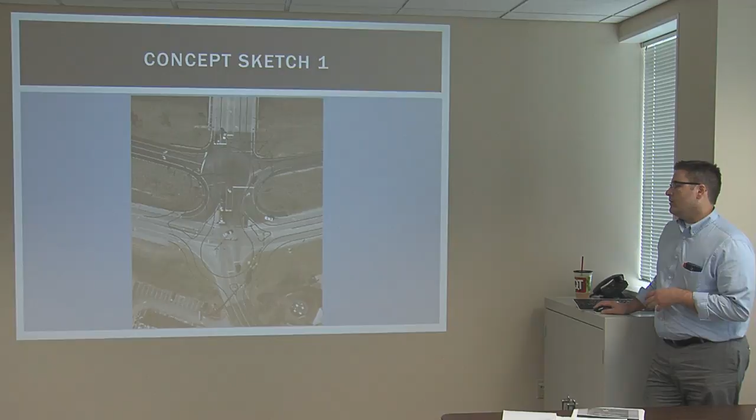We've got our project scope defined. We're going to look at several different options. We've come up with two different roundabout configurations that are a little bit novel. While they're unique, and you haven't really seen much that looks like this around St. Louis, they're not completely foreign. We didn't dream them up completely.

So we want to sit down with the consultant and with MoDOT, look at the options we've come up with, see if somebody with more experience at roundabout design than we have has a better idea, select one option to move forward with, and then take a step-by-step approach, just analyzing that the next step makes sense, and moving forward, eventually getting to the point where we have a concept plan and budget that we can do a grant application on.

Any questions on that?

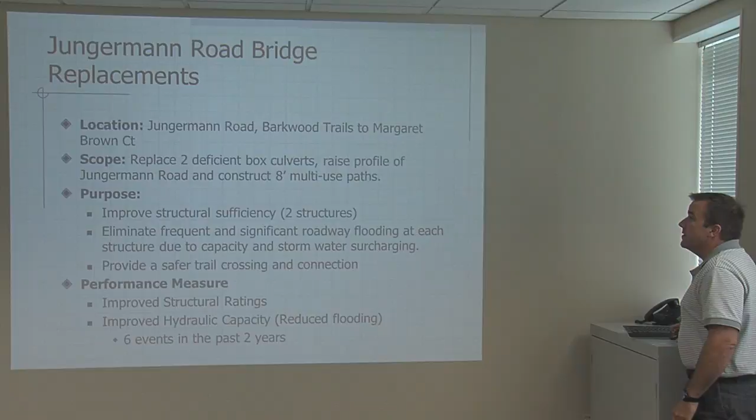St. Peters has 3 projects that we will be presenting this afternoon. The first is the Jungermann Road Bridge Replacements Project. Jungermann Road between Barkwood Trails Drive and Margaret Brown Court has 2 box culvert structures in that segment. One is a 4-barrel box culvert, the other is a single-barrel box culvert. Both of those culverts qualify for MoDOT's annual or biannual inspection program, and both were found to be structurally deficient.

East-West Gateway, at the beginning of this year, sent out a solicitation for supplemental bridge replacement funds. We submitted for that project and received FY16 construction, or FY15 design and FY16 construction funds, to replace those culverts.

One of the things that pointed us in that direction, other than the insufficiency of those 2 box culvert structures, is this area experiences periodic flooding, flash flooding. This year has been especially troublesome, with the road closed as many as 5 times in the last 6 weeks due to various flash floodings. But on average, about once a year we have to close the road due to some type of flash flooding, and that's due to 2 things.

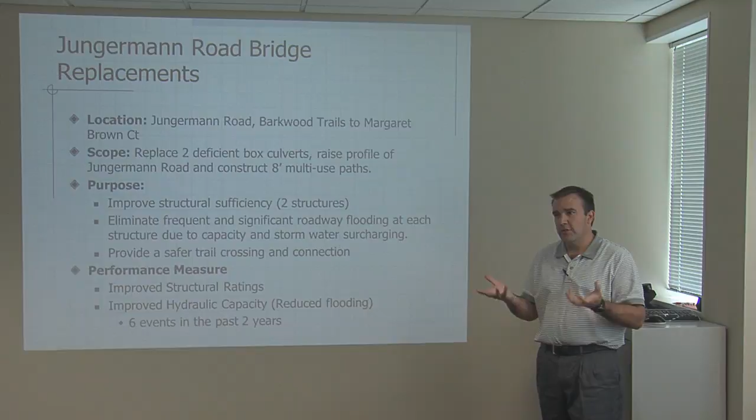These are findings from a stormwater master plan study performed citywide by Black and Veatch. One is that both structures are not hydraulically sufficient for the amount of flow going to them - they need to be larger, with higher hydraulic capacity. The second piece is that the road profile itself, as the creek rises, the storm sewers that connect to these culverts surcharge, which also contributes to road flooding. The stormwater literally comes out of the structures and into the roadway.

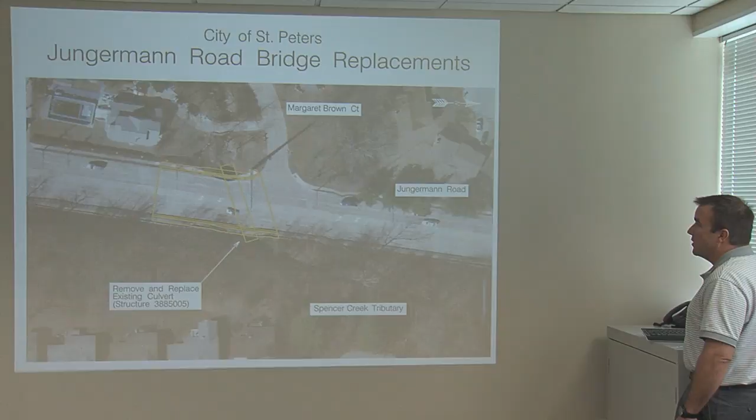So this is the project location. Just for reference, north is this way, south is that way.

Willott Road is maybe about a half-mile north here. This is Barkwood Trails, and this is a trail crossing. So this is the 4-barrel culvert. That picture I showed you where the road was kind of rolling, this is where that culvert is located.

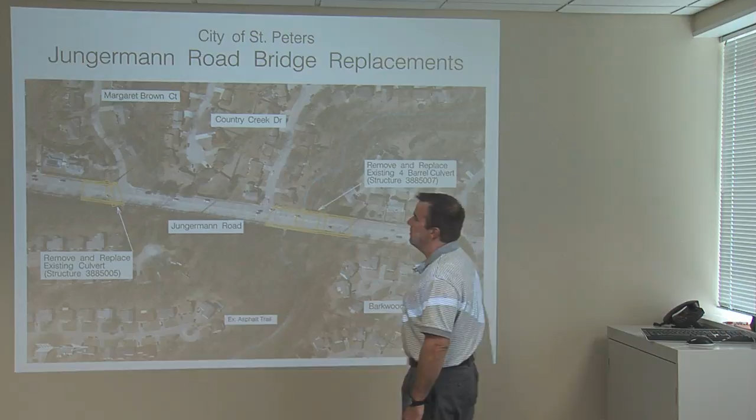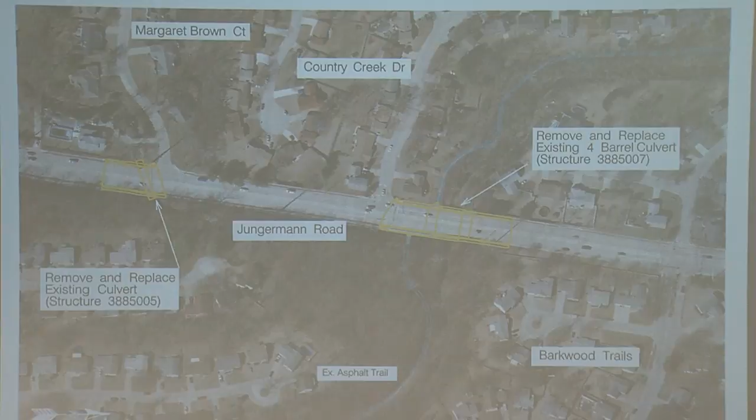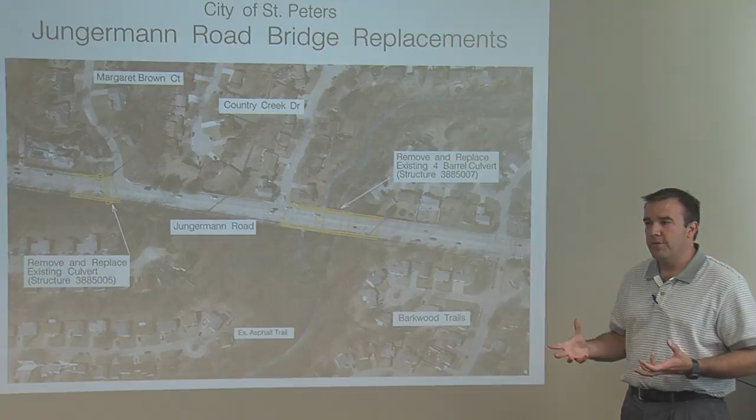And further to the south there is that single-barrel culvert. So again, both culverts met East-West Gateway or MoDOT's minimum rating for funding, and so we have received federal funding for that. But the key piece on that funding is the federal funds can only be used to replace the culvert and perform the related roadway work.

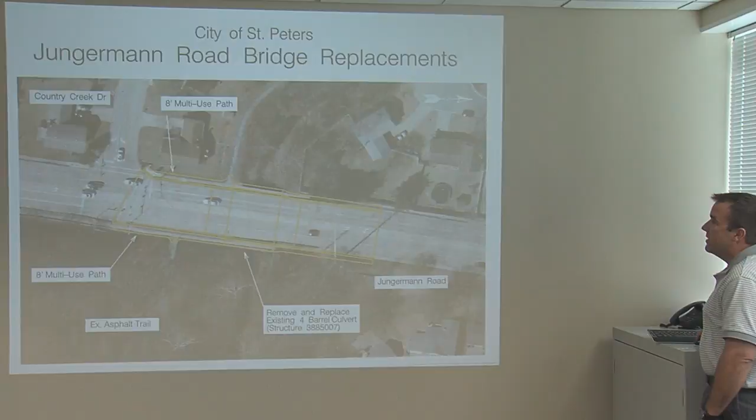So that work I was telling you about, adjusting the roadway profile, the federal funds won't pay for that. So our grant application to the road board is asking that St. Peters will utilize the federal funds and its own funds to pay for the design. We have actually selected a consultant to do that work.

HR Green, and they'll be starting here in the next month or so. We're asking for 80% of the local match for the federal reimbursed portion of the project. And then for the road construction, what we're asking for is an 80-20 split, so 80% funded through the road board with the 20% match from the city of St. Peters.

So at the end of the day, you've got a $2.1 million project, 69% of it funded through the federal grant, 23% funded through the St. Charles Road Board grant if we're selected, and then 8% funded by the city of St. Peters. So the primary purpose of the project is to improve the hydraulic capacity and structural sufficiency of the culverts, but also adjust the roadway profile. Both those improvements improve the reliability of Jungermann Road and stop this almost annual flash flooding problem we have.

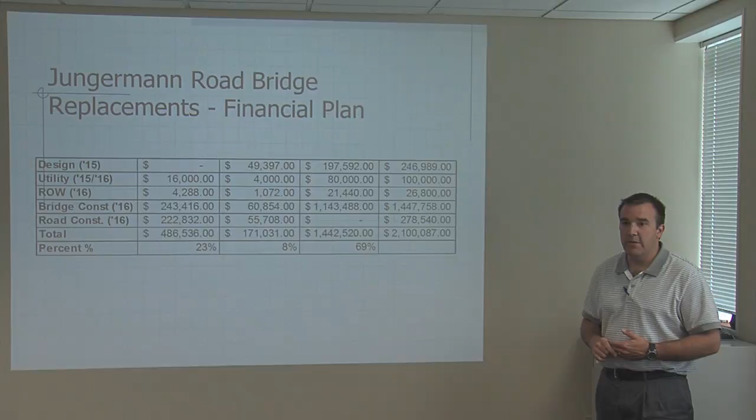Okay, the second project is the Jungermann Road, Boone Hills Drive intersection culvert - I guess we have to call it the Jungermann Road, Boone Hills Drive Culvert and Intersection Improvement Project. This project is located at the intersection of Jungermann Road and Boone Hills Drive. It's also replacing a deficient box culvert.

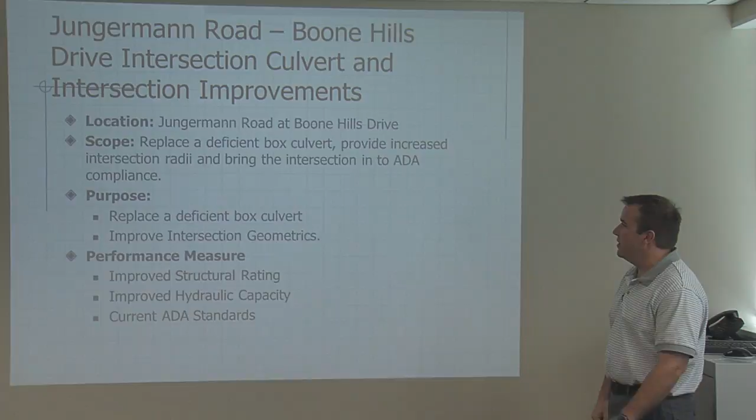The difference is this culvert is not large enough to qualify for MoDOT's program. Actually, if you drove this intersection, you probably wouldn't see the culvert, you wouldn't know where it's at. It's been connected with various pipes to the east, and various improvements to Jungermann Road have almost made the culvert unknown, but it's there.

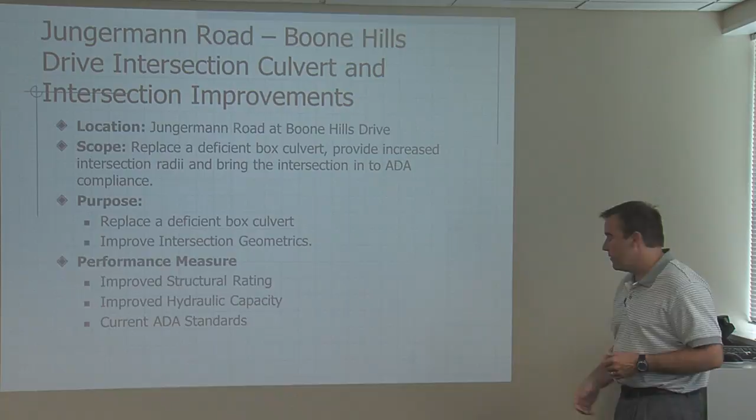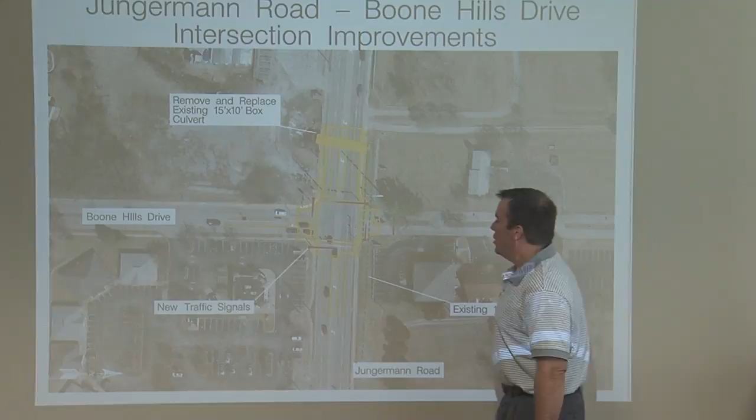So the purpose is to replace this deficient culvert, but also improve the intersection because this culvert is located so close to it. I'll show you a picture - this is the culvert I'm referring to. It's a 15 by 10 culvert structure. This is the Boone Hills Drive, Jungermann Road intersection. This project is located north of the previous project I just spoke to.

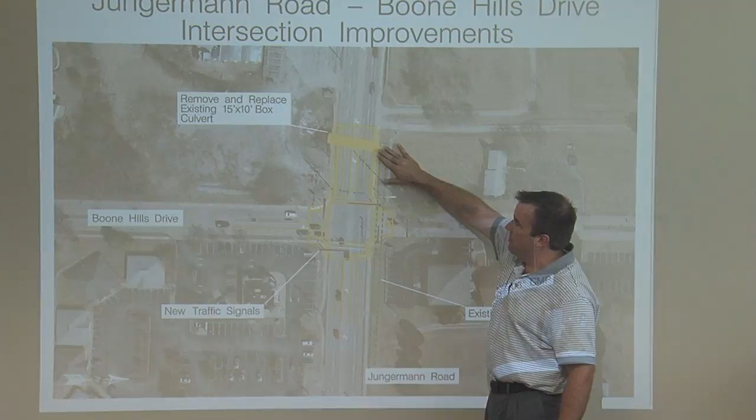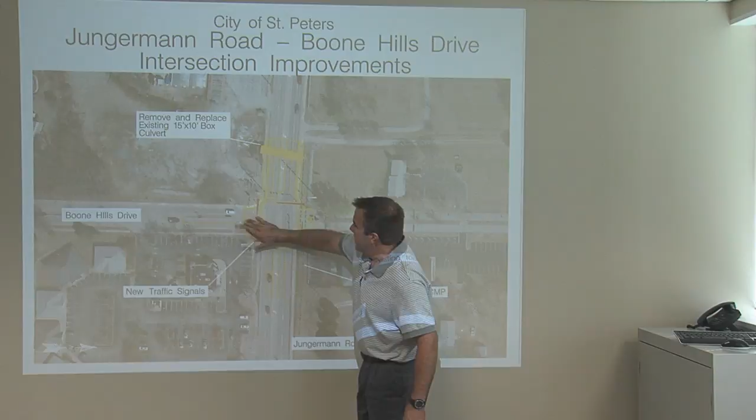So the issues we have are the structural sufficiency of this culvert, and I'll show you some pictures that show that. But also the intersection itself is substandard in terms of the radii. It's very difficult to make a southbound right-hand turn and stay within the outside southbound lane. So we want to improve the intersection radii to get the same situation coming from this development.

Also, we want to improve the intersection and bring it up to ADA compliance. So we'll get new ADA ramps, new signals with ped push buttons, and the types of crossings required to meet ADA compliance for the intersection.

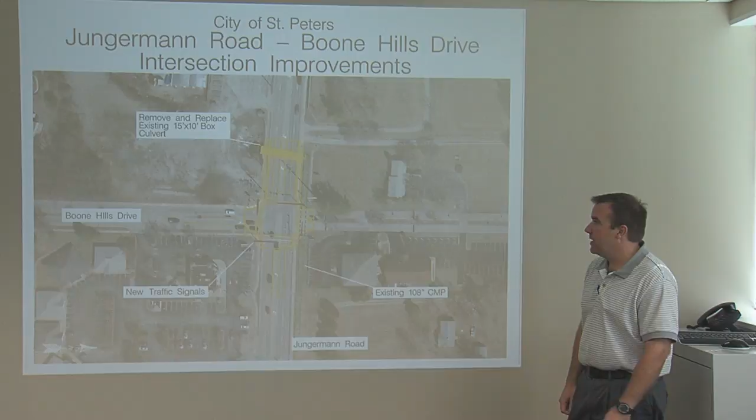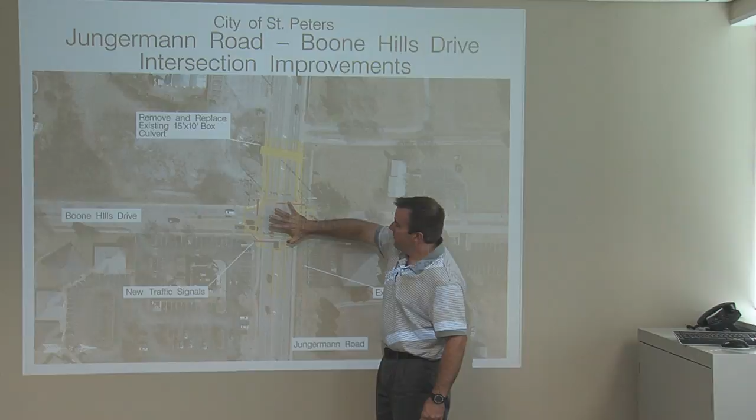We recently inspected this culvert and saw that it was deficient. We had this in our long-range plan to improve anyway, and so we thought if we're going to improve this intersection, we might as well go ahead and improve this culvert at the same time. This area also experiences periodic flooding, not quite as frequently as the area to the south, but it does. We have flooding that occurs primarily because of this.

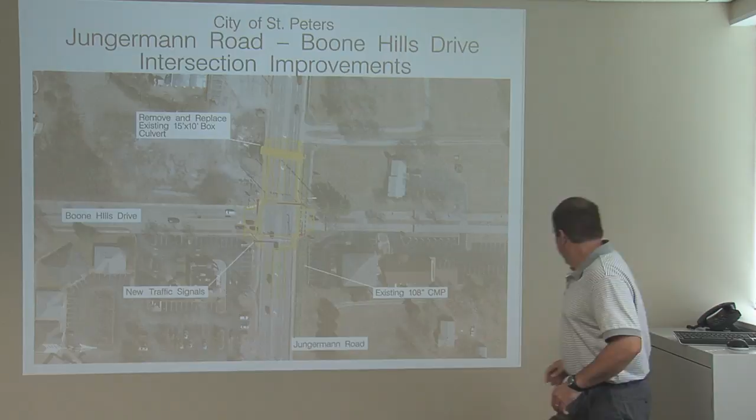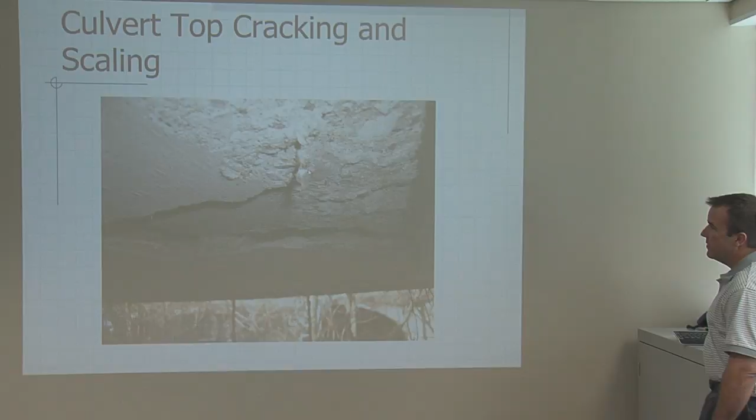Let me just show you a picture, it would be easier to explain. So these are pictures of the culvert itself. This is inside the culvert looking up. You can see that we've got some scaling and some pretty severe cracking that's occurring.

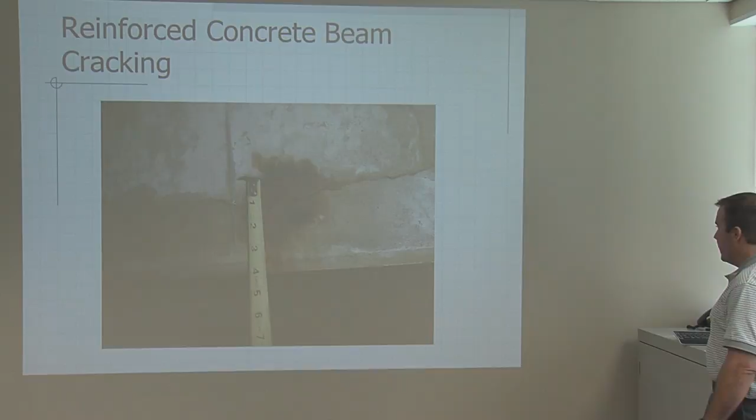This culvert structure has been improved and lengthened as we've improved Jungermann Road. There's portions of the original culvert, which is a stacked block wall, and there's portions that are literally beams on top of this stacked block wall, so it's almost like a bridge. And then we've got a portion that's like a traditional reinforced concrete culvert. So this has been cobbled together as we've improved Jungermann Road.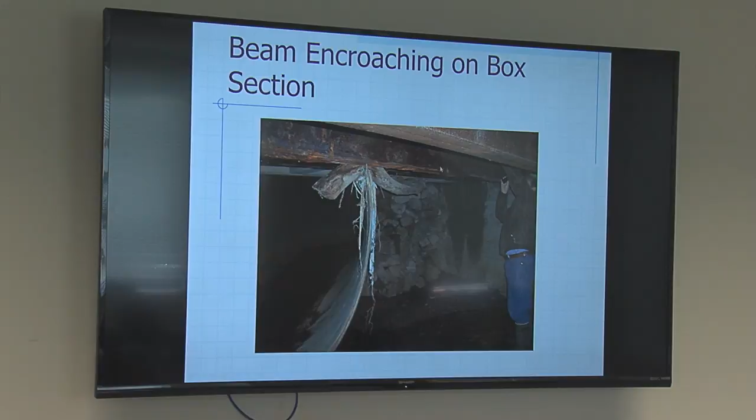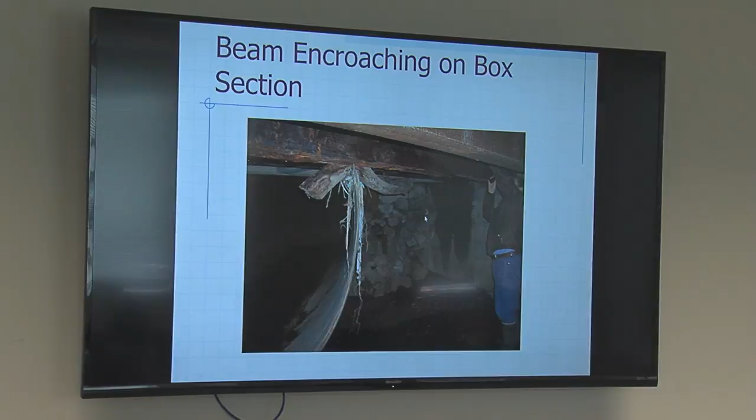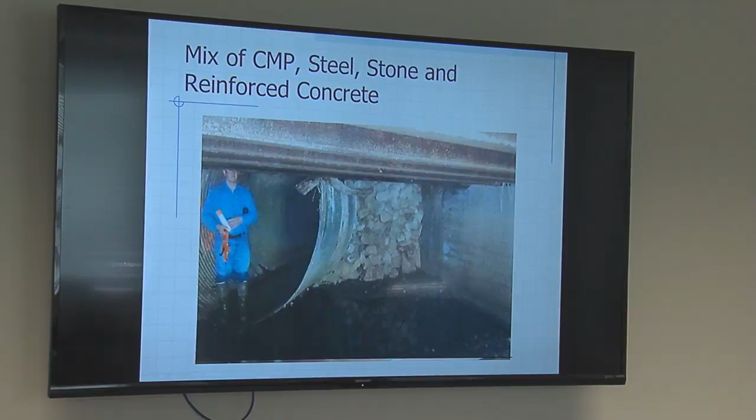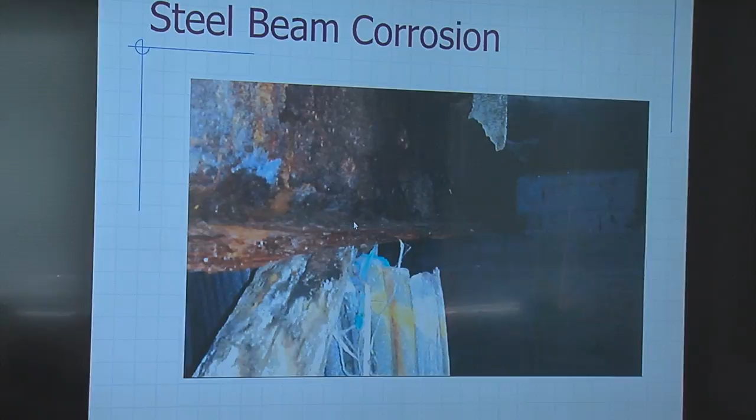You can also see you're starting to see corrosion on the beams themselves, and these are things that have us concerned about the structural sufficiency of the rating. We still think it's safe to drive on, but it's something we need to address before it gets worse. Again, this is another picture showing a reinforced concrete wall section of this culvert, this stacked stone original piece, the CMP coming in, and these beams. This was an attempt to show you some corrosion, but I got a better picture. This is more corrosion on the beam, and you've got some leaching and infiltration that's taken place as well.

So we've got some issues with that culvert that we want to address, basically replacing a deficient box culvert section, but also improving the intersection. Again, the culvert itself is not large enough to qualify for MoDOT's federal program, so we did make an inquiry. They told us the structure is not large enough, it has to be at least 20 feet. You have to span at least 20 feet for it to qualify, so we're not able to go after federal funds.

So what we're requesting is a $1.14 million project, 80% funded by the road board, and 20% funded by the city of St. Peters. Any questions?

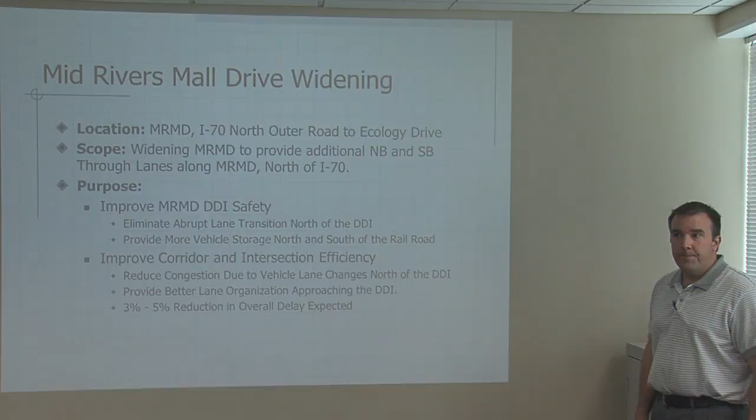Up in Jungermann, for that realignment of that intersection? Yeah, it's just south of that. What's the location, the distance there? I mean, I know you're adding additional lanes in up there, and it looked like you're adding additional lanes in down there. This location is half mile-ish or so south of there, maybe a little further, but it's in that general location.

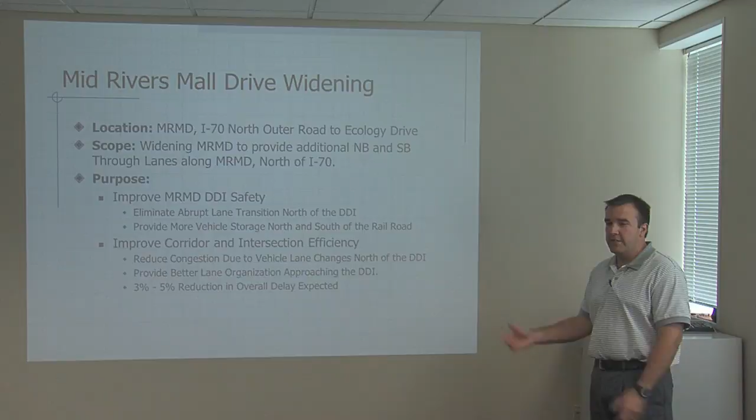The last project we're presenting here is the Mid-Rivers Mall Drive Widening Project. This is a project we had submitted last year as well. This is improving Mid-Rivers Mall Drive from the I-70 North Outer Road to Ecology Drive. We want to widen it from a 3-lane section to a 5-lane section, adding an additional northbound and southbound through lane. We also want to look at the intersection of the North Outer Road and Mid-Rivers Mall Drive to see what we can do to improve the geometrics there.

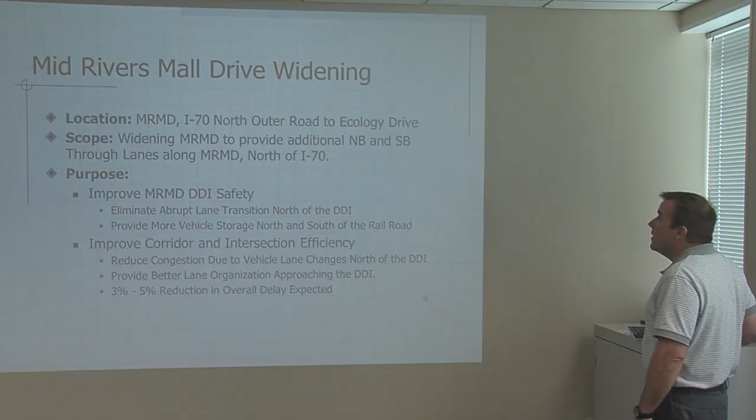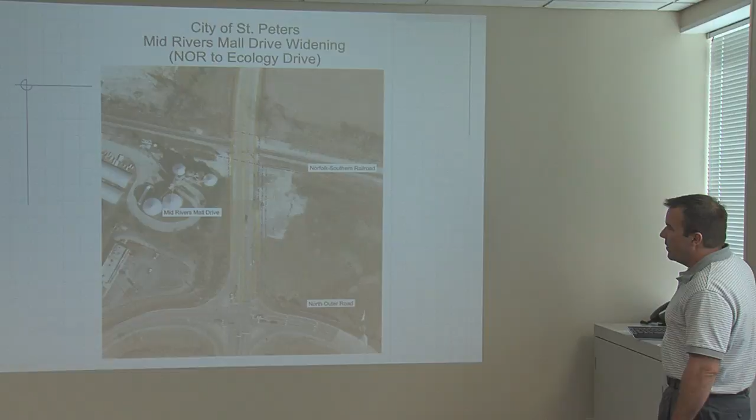The primary driver for this is, let me get a better picture. Coming out of the DDI, there's a very abrupt transition. I'm sitting on the I-70 Mid-Rivers interchange, the Divergent Diamond Interchange, looking north. As you can see, we've got 2 northbound lanes that come over and get to this point. If you're in this lane, you're supposed to go eastbound onto the North Outer Road, but a lot of folks want to merge over quickly to get into this northbound through lane, and north of the North Outer Road you've got a really quick transition as well.

So what we want to do is basically construct an additional northbound through lane, take you across the railroad tracks and up to Ecology Drive, and do the same thing as you're coming southbound. You've got a left, a through, and a second through, so you can really make use of the 2 through lanes, north and southbound, through this DDI, and eliminate this abrupt taper that we have.

The benefit of the additional lane is this: it'll provide more stacking when there's a railroad crossing just north of this intersection, providing more stacking and queuing distance, so that when we have a train that disrupts traffic flow, we've got more queuing and won't back up into the interchange.

What's happening with traffic counts in Salt River and all that? They have continued to grow, so Salt River is definitely getting a lot of use. We've got various property owners north of 70 primed for redevelopment, interested in selling property, so we're expecting that area is going to take off at some point, and when that happens, this project becomes even more important.

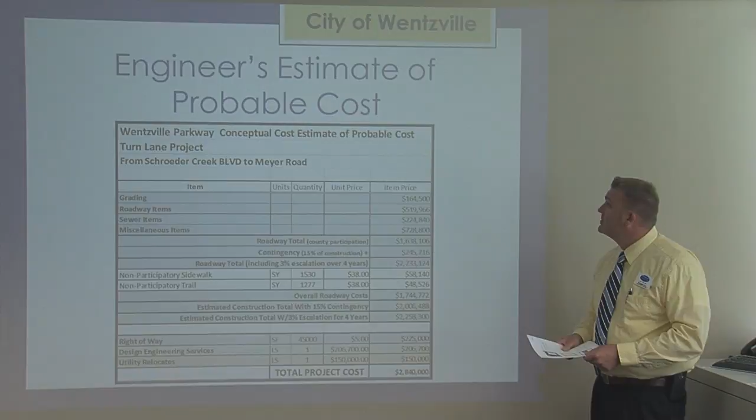This is one of the major differences - we really looked and reevaluated what the scope of the project was. It was shortened up a little bit in total length, as well as tightening up the estimate as far as what was asked for at the federal level.

This wound up being one of 3 projects that the city was successful in obtaining East-West Gateway funding on. It was cut back, so it's a 50-50 cost share with the federal government. The city is looking at 80-20%, so about $1.136 million in county funding and $284,000 in the city's part to continue with this turn lane improvement.

Here we can look a little bit. We're basically proposing to add an additional 12-foot lane to the outside south side, as well as a 10-foot trail on that portion of the roadway.

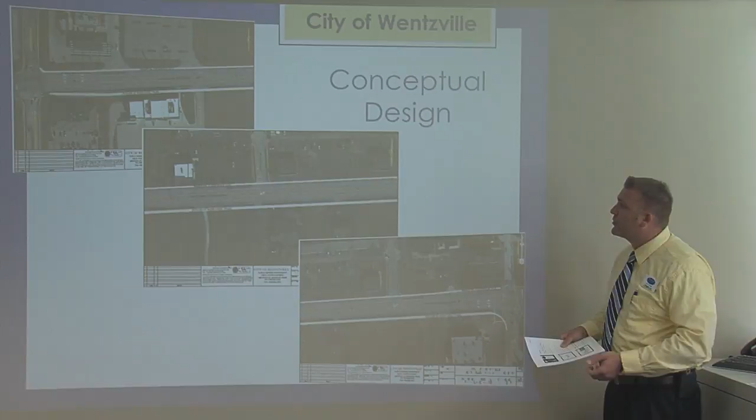Our schedule is to go into design in early 2017, with 2018 required for right-of-way, and then in the 2019-2020 season to complete construction.

Here's what the existing cross-section is, just 4-foot sidewalks on either side with 2 directions each way of 12-foot lanes of traffic. Our proposed cross-section is really just adding that additional 12 feet of pavement.

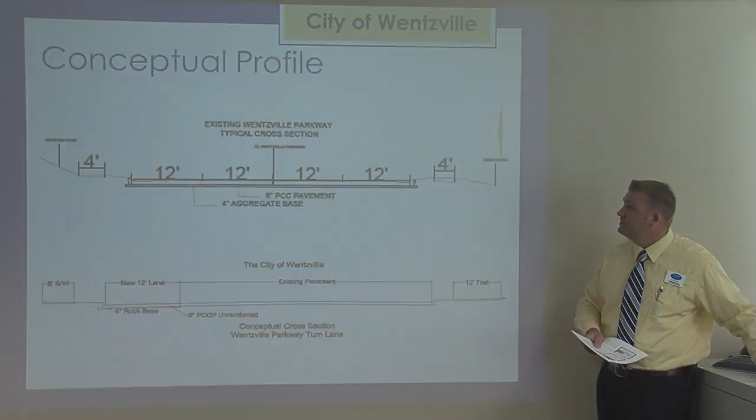Any questions on that project?

Our second project we're looking at is Highway 61 West Outer Road, and this I believe is the 3rd year in a row that we've presented this.

This again is under a little bit different format. In past years we presented it solely as a design project, hoping to be ready for anticipated future MoDOT funding. What the outer road is, it's really an integral part of the city's thoroughfare transportation plan - it's a north-south connector road that unites and brings the entire northern side of the city back into town as far as shopping and access to amenities.

So what we looked at in moving this forward is the fact that the safety improvements currently underway on Highway 61 could limit a lot of access for existing residences, future development, as well as businesses in that stretch.

If we look, what we've done is we originally looked at Phase 1 starting at the Parkway and moving north towards the population centers that would access first. What this does is flip it from one end to the other, but it also incorporates a construction component of the project.

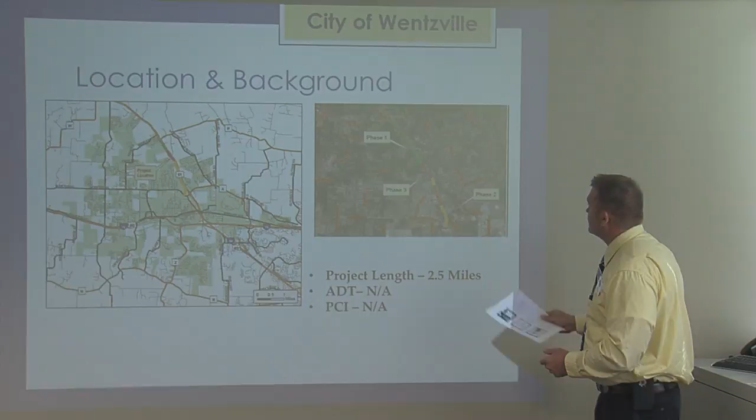Phase 3 is kind of a tough spot to build if you've driven through there - it's pretty much rock bluff, almost right to the edge of the existing right-of-way. A lot of this project involves conceptual design of how to deal with that topography. Then we make Phase 2 a design further to the south.

What we can do is improve safety along there. We're providing access and encouraging a lot of development. There are some pretty good sized parcels right off the Parkway that simply don't have access or the transportation for people moving through them.

We're still looking for a cost-effective design to utilize what right-of-way is out there. There are a lot of existing sections of Granville Drive, if you've driven through there, so there is some road bed that would need improvement, but there is an opportunity to use that.

We're also hoping, as outcomes, to reduce accidents, promote additional funding opportunities, as well as commercial and residential development, along with continuing partnerships with FHWA, MoDOT, and St. Charles County.

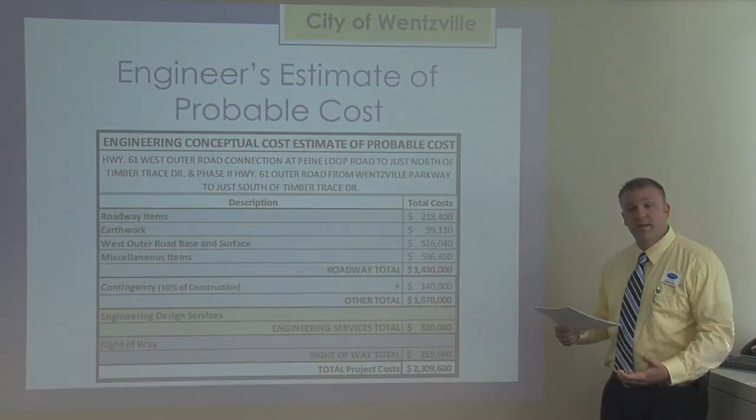At this time, what we're looking at is about a $2.3 million project. It's a design of the entire stretch with a conceptual design in the middle piece and then a construction component. The real difference at this time is this project now has a private-public partnership developed to help fund that first phase construction.

Looking at the cost, the private developer is really looking to participate by providing right-of-way and then providing the construction and design for that first phase of the project to get to their proposed Lexington development. So what it works out to being is, of that overall project, we're looking for $1.455 million from the county. It winds up being $305,000 from the city, and then private participation of almost $550,000 to move forward with the project.

On the 549? That was based upon really the estimate to provide the improvements within that stretch of road to get to their basically facility, or to where their project will begin.

It is a little bit different if you look at the percentages or numbers, as we typically are 80-20 as a municipality for the city. It's an 80-20 participation in right-of-way and design, and then the construction is bumped up in that portion where it's higher from the developer side with the construction aspect.

This is based on his timing and the submittals that he's looking for the city for the approval of that development. It's a little bit more fast-tracked than our typical projects. This would be looking to go to design of phase 1 very quickly, end of December, first part of January, with project phase 2 design to follow up pretty quickly after that.

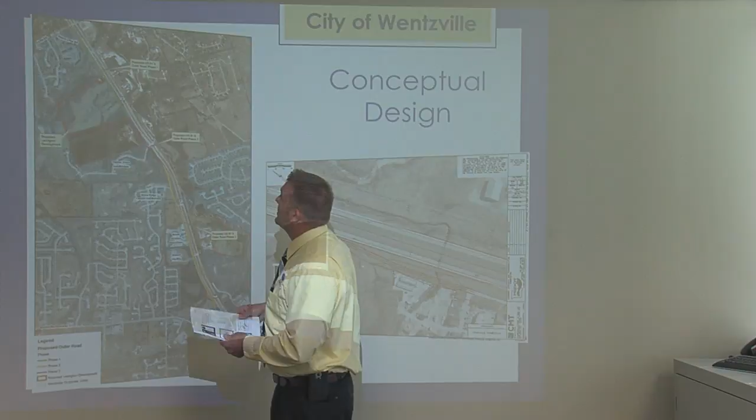The proposed development here is outlined in red, and that roadway through phase 1 would connect through right to the southern section of that development.

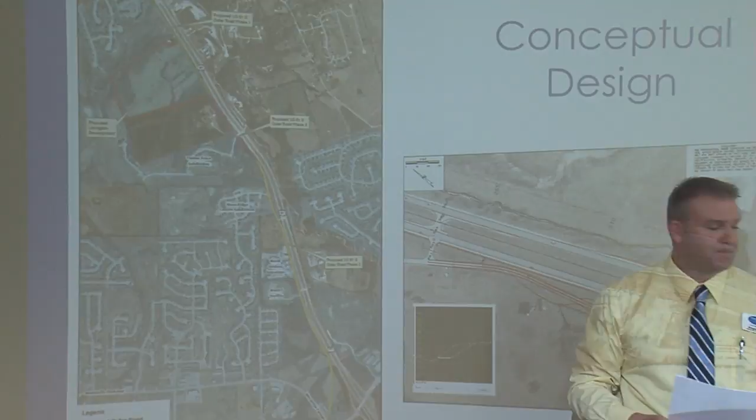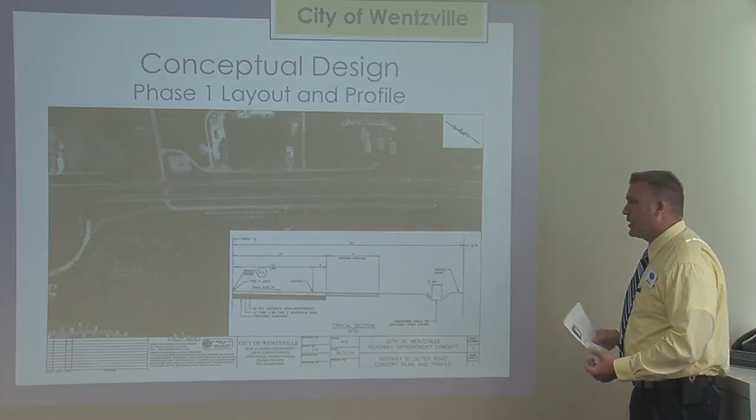Just a little bit conceptual as far as what that would look like, as far as what cross section we were proposing. A little bit different, a little bit modified from what our typical city standard is as far as curb and gutter and enclosed storm system. But it's really kind of working with what's out there and also following a little bit of MoDOT design criteria as far as how they look at those outer roads.

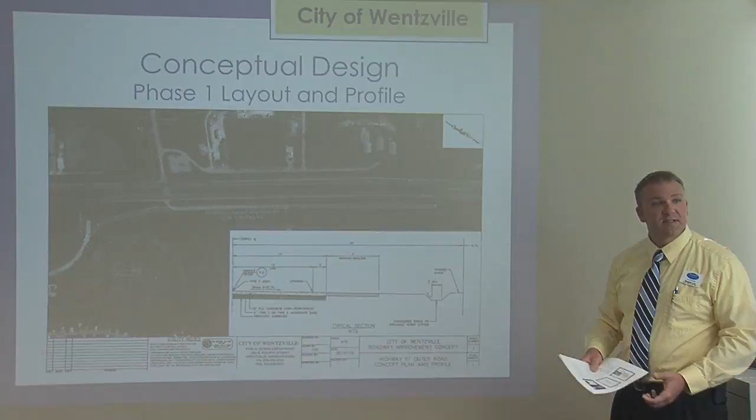Here at the end is just another look at some existing conditions. You can kind of see here a little bit of proposed. This would be looking north from World Outdoor Emporium's current stub street there at the end of MoDOT maintenance. This is just a quick smattering or collection of some of that existing roadway that's in the field. Really ones that are looking to connect in with new road as well as reconstructing these existing pieces to provide that continuous transportation improvement on the northern side of the city.

Is this part of the MoDOT owners? This would be out right there by QT? It would. Okay, so you're planning on getting a piece of that property from MoDOT, or was it Granville Drive? Correct. There would be the possibility of utilizing some of their existing right-of-way that goes in front of their maintenance facility. And then once you go past that, it's Bornhop Trust that owns that next piece. So there would be some coordination or some opportunities for additional private partnerships in there, as how you get to the parkway is a little bit of flexibility based on what their development needs are.

So is this going to run all the way to the parkway?

Phase 2 would run from the parkway, yes. Phase 3 we're really looking at conceptual design at this point because we have some topographic limitations as well as some property acquisition hurdles out there.

It's really a rock bluff within about 15 to 20 feet of the existing road. So there are some opportunities or ways to work with private development in the area to maybe swing that road back behind and try to continue that access, maybe not in a traditional outer road, but in some way that provides that same connectivity.

Based on this public-private partnership, we've already had one development meeting where there's interest from a developer directly south of that project to participate as well, with some right-of-way and possible assistance in acquiring additional right-of-ways for other connector roads in that area. So I think it starts to kick off some momentum and looks at continuing development along that corridor of the city.

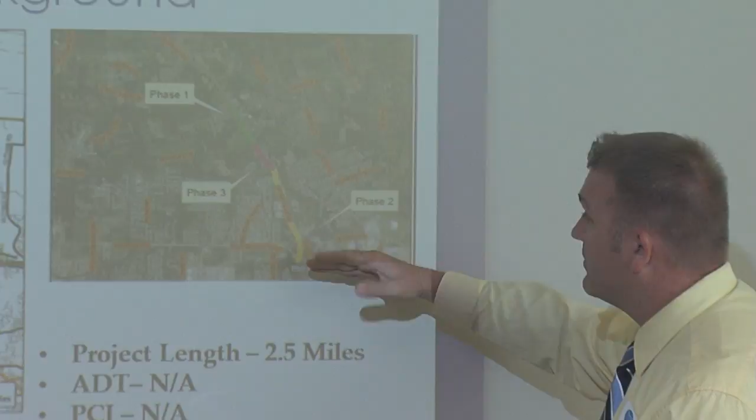Start north, work south, then skip a very tough piece with a bluff in the middle, then work our way back south to north to connect that subdivision in, working with private partnerships in the area to find ways to bypass that hill, or if need be, look at a conceptual design that takes it through that bluff.

Ballpark stage, phase 1 through 3 - I mean, 15, 20 million. I think we're somewhat going to be close to where we were before. We'd originally proposed about an $885,000 design project for an overall $8 to $9 million worth of roadway. So I'd say we're still somewhere in that $10 million ballpark.

It puts us a little tighter when looking at this piece. That's the unknown right now, as it deals a lot with how you'd blast or deal with that rock hill. And from some of the private developers in the area, the individual who owns that bluff is somewhat reluctant to have any development in that area.

So that could be the one we're held up on, but I'd say we're still in that $10 million range overall. If you don't get the piece in the middle, we can do it - we've already looked at opportunities to provide access through the interior portions of the subdivisions. It wouldn't carry that same continuous outer road, but it would still provide connectivity, maybe working behind the bluff to accomplish somewhat of the same goal.

Is this stone on that bluff usable to fill? It could be - a lot of it is. You're going to need fill on the other end, right? Right, there are some pretty good draws and sections through there. We'll need some retaining walls and fill. It is Burlington limestone.

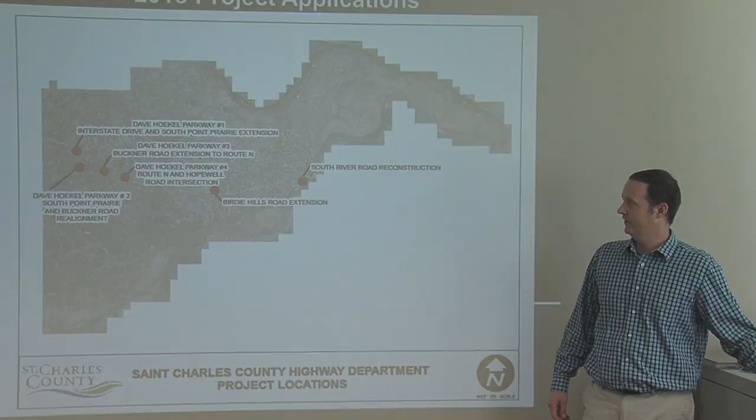So to give you an idea where we're at, South River Road is here in St. Charles, east end of the county, a Golden Triangle reconstruction type of project. Moving a little farther out west with a new road at Birdie Hills. And then the four projects that would make up the Hoekel Parkway, from basically all south of I-70 and looping around, including portions of Route N.

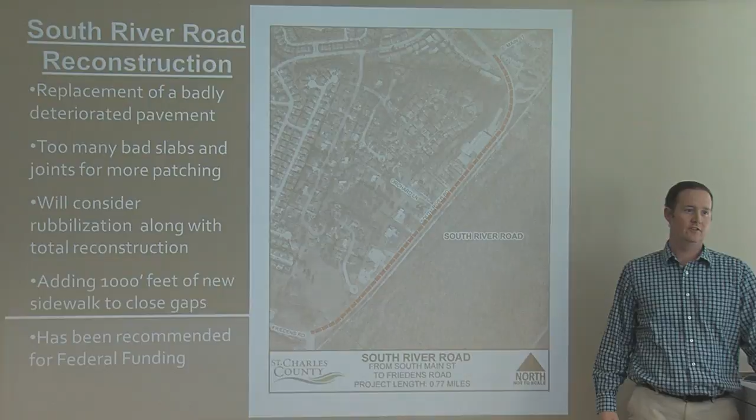We'll start first with the South River Road Reconstruction. What we're talking about here is the replacement of pavement that is badly deteriorated and has been patched multiple times in the past, and it's basically come to the point now that future patching is not going to solve the problem. So it would be more cost effective to either break up the pavement in place, like a rubblization, or completely reconstruct the pavement. Either way, we'll have a whole new driving surface on South River Road as part of the project.

Also included is filling in some gaps, roughly 1,000 feet of sidewalk, to provide a continuous route from near the Juvenile Justice Center down towards the new intersection we did a few years back at Marina Parkway and Friedens Road. This project has been recommended for federal funding.

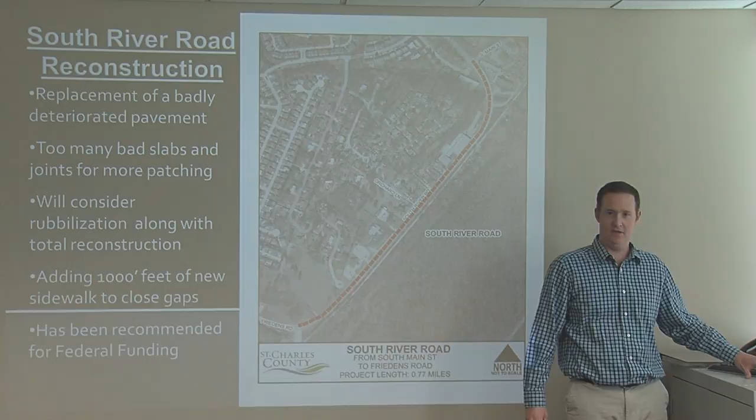So construction on this one is roughly a $2.2 million project. The federal government will be paying 80%, so $1.744 million, and we're here today to request $436,000 in road board funds to make up the match.

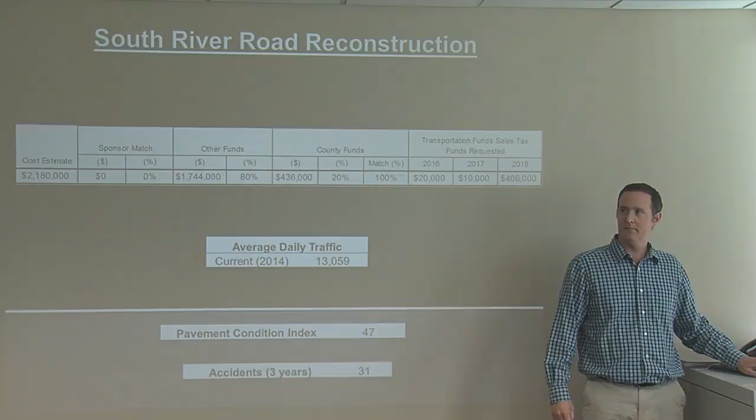Feel free to stop me at any time, I'll just keep moving on. Next is the Birdie Hills Road Extension project. This would be for design and partial right-of-way funds to construct a new road from Birdie Hills, potentially down to somewhere on Boone Road.

So I realize this is a little bit vague here. The basic idea being the project would include an interchange on 364 at Gutermuth, either where the overpass is now or a potentially different location, but somewhere along 364. It would include, from what we've seen so far, probably 3 or 4 potential options. We currently have a consultant on board doing a very broad overview study of this entire corridor.

They're starting to narrow down the numbers. What it looks like is we're expecting, once the road would open, traffic in the range of 11,000 to 15,000 vehicles would use a road from an interchange somewhere on Route 364 up to Birdie Hills at the top of the screen there. That would provide a significant reduction to some of the traffic problems down at 364, 94, and the Mid-Rivers Mall Drive intersection.

So over the course of the rest of this year, our consultant will be narrowing down those options to one final option. So I'm here today to talk about the right-of-way, some limited right-of-way funds and the full design funds for the road extension. We're asking for the right-of-way funds now, basically in case some properties were to become available once they've narrowed down the route later this year, so we could go ahead and grab them up.

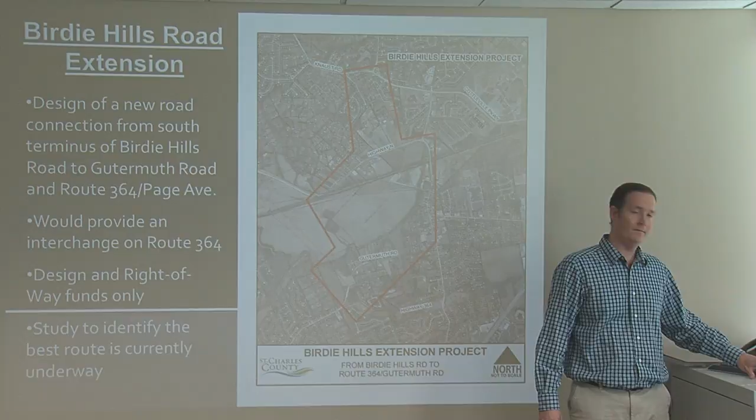So the basic cost breakdown - sorry, I don't have the design and right-of-way split out - but what we're talking about is $2.2 million to do design and partial right-of-way, split basically over a 3-year period leading to construction, which of course we'll come back and be requesting in the future.

Do you have an estimate on total construction? We do not have an estimate yet. Once they refine these three alternatives, we'll get estimates at that point, which could be anywhere from $5 to $15 million. We'll look at the most cost-effective option, narrow it down to two alternatives, and then it'll be a balance of cost versus traffic.

So buy it now when it's cheap, that's what you're looking for. That is the idea, right? But of course, not until we have a good idea, at least from the study, where we'll be going before we start the design. As we get into the design, then we can fast track potentially some right-of-way parcels.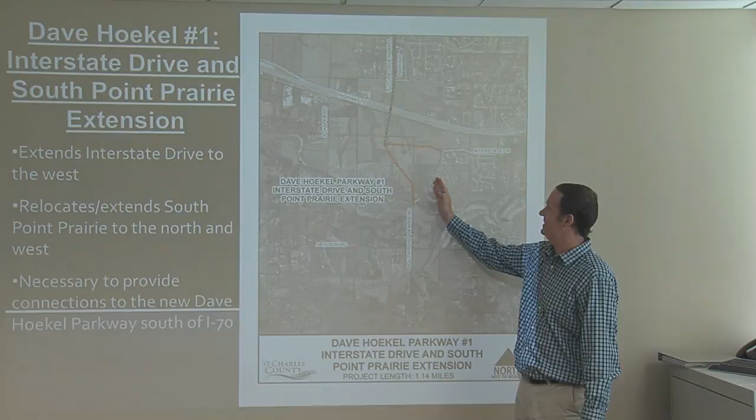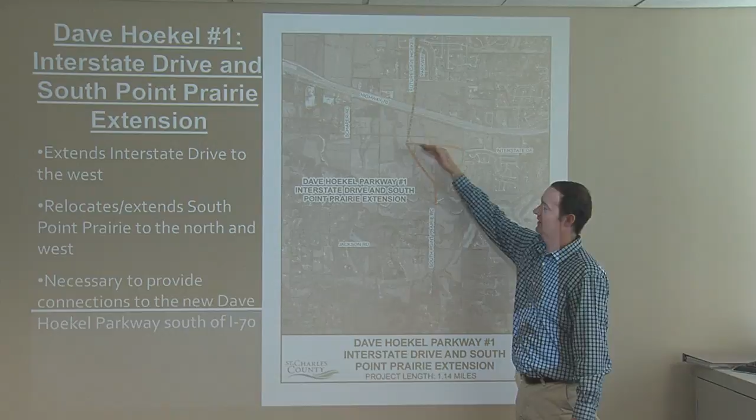So as I was saying, South Point Prairie veers back to the right. This would be design, right-of-way, and construction funds to bring South Point Prairie over to meet the new interchange and extend Interstate Drive to the west also. Otherwise, the new interchange isn't going to meet anything the way things are right now.

So construction-wise, we've estimated design, right-of-way, and construction at $4.35 million. It's a new road extension. East-West Gateway is not going to participate in the new road extension, so therefore we come to you asking for 100% of the funds to do the design, right-of-way, and construction of both of those roads. It's a total project, two roads, in 2018.

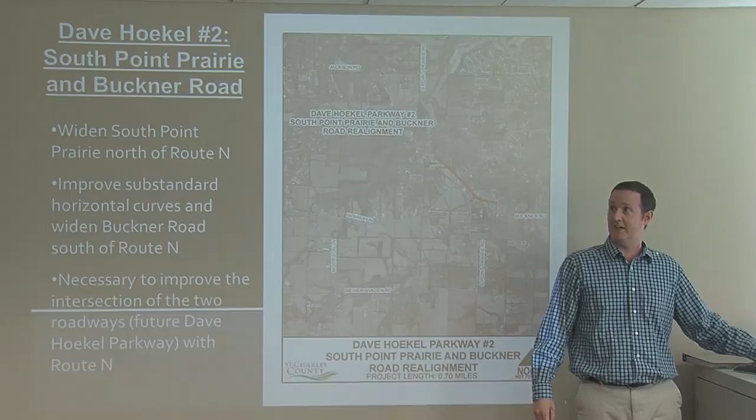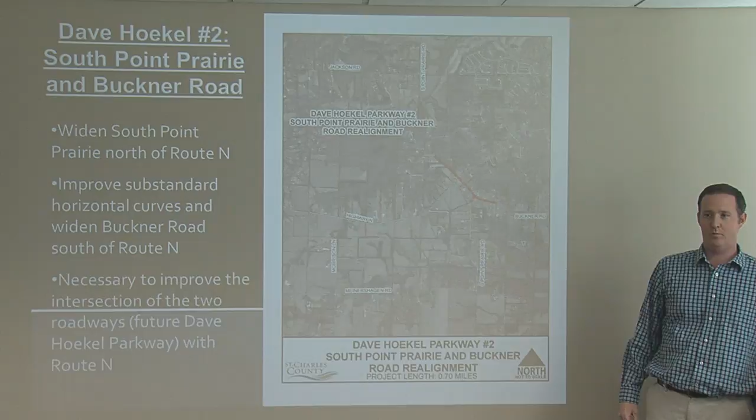Second project is down where South Point Prairie hits Highway N. South Point Prairie now continues through N, turns this way, and whereas Buckner then comes off and has a pair of 90-degree turns there. So what we'd be looking at doing with this project is widening South Point Prairie as it approaches Highway N, and then doing something with the curves on Buckner Road, which I'll show you on the next slide. That's basically coming off of Buckner down this area, straightening through, and making this a through route where it'll go straight up to Highway N, eliminating 3 to 4 pretty undesirable curves.

So our cost on this one is roughly $2.5 million is what we're looking for. Again, it's primarily new road, so it's something we have not submitted to East-West Gateway. We're looking for design, right-of-way, and construction funds to build this segment of the future Dave Hoekel Parkway.

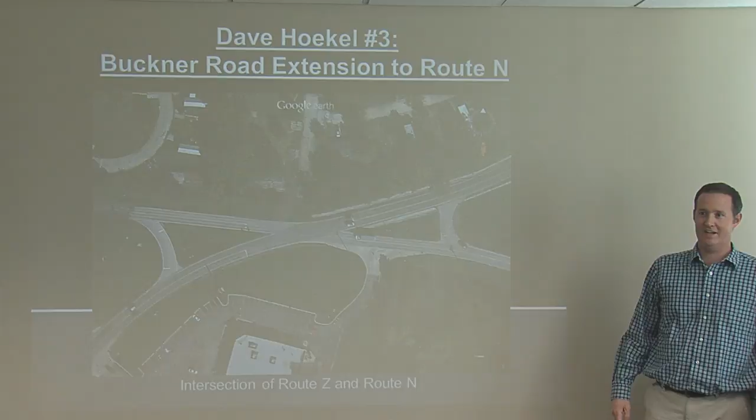Along those lines, I have another project just a little bit to the east of here, which is the extension of Buckner Road. Rather than routing traffic up through Highway N and through this intersection at Route Z, it would be taking Buckner Road and heading straight east, making this the direct connection from Highway N to Buckner. Most of you guys are familiar with what it looks like at Z and N right now, and it's a bit of a mess, rather complicated, so anything we can do to avoid that would be a positive, besides the fact that the new parkway will follow Buckner.

Cost-wise on this one, again, it's another $2.5 million project, and we're looking for all road board funding. It is design, right-of-way, and construction, same general schedule as the previous project.

One last project for you here, the intersection of Hopewell Road and Duello Road at Route N. It's one of the most dangerous intersections in the county. We did an interim improvement to Duello several years back, where we moved the skewed intersection up to a better point on the curve of Route N. But we still have high speeds on Route N, some substandard curves, and offset intersections between Hopewell and Duello.

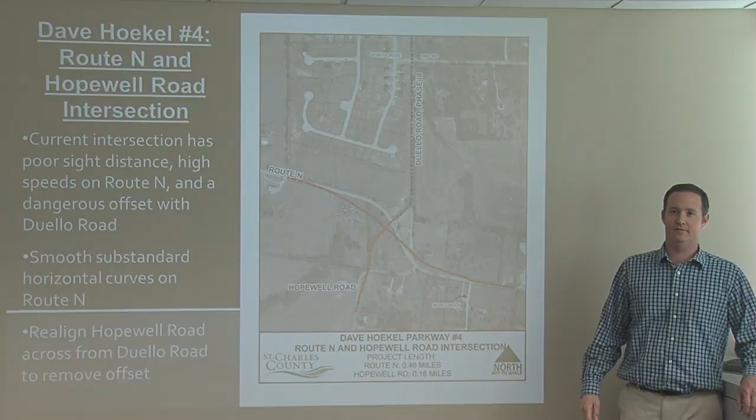So the plan would be to relocate Hopewell Road so it's directly across from Duello. We'd have to do some improvements to this interim intersection to widen it out. This would be all new road, and then there's talk of a relocation on Route N also to smooth those curves.

Here's a couple shots. This is from the newly relocated Duello Road. It's actually better than it used to be, if you can believe that, but looking to the west, it's still not great - it shows the sharpness of the curve there. The other one is also to the west from Hopewell, and Duello is just about where that car is. So we have that offset turning movement, not to mention the high speeds on N that make this still a really dangerous intersection.

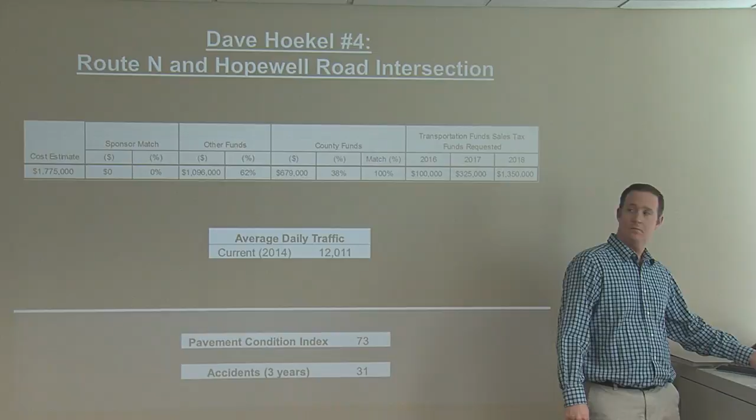Go back a couple. Are we redoing part of N here? Yes, where the state just redid. They just added shoulders, right?

Yes. We let them know ahead of time, and actually they already knew, because this is federally funded - it's on the books, they know it's a project. We talked to them, and once they knew the schedule, which was we probably wouldn't build it for 3 years, they didn't want to mess with their plans, so they just went ahead and put the shoulder on.

It's a little safer with a 3-foot shoulder. If you've driven D or DD or N, it is nicer, but it would not be the same as what we're proposing to do with the curve smoothing. Yeah, it's still bad.

Is that your ranking and preference from 1 to 4, these numbers? It is not - I would say 4 is the most critical. It's also the one of the four that has federal funds. I would say of those, project number 1 would be the next most important, because it's going to tie into the interchange, and we have to have that interchange connected.

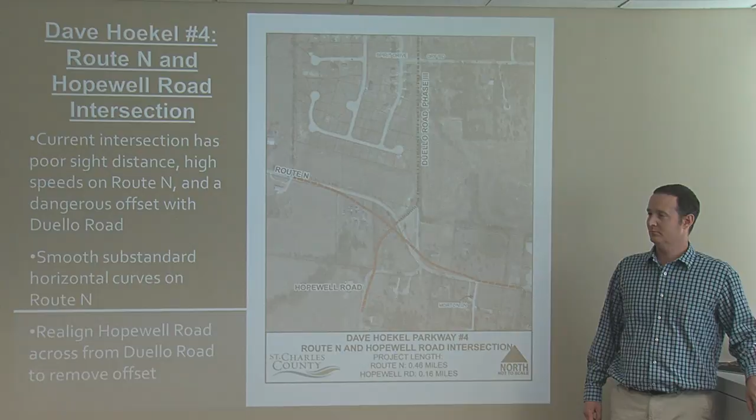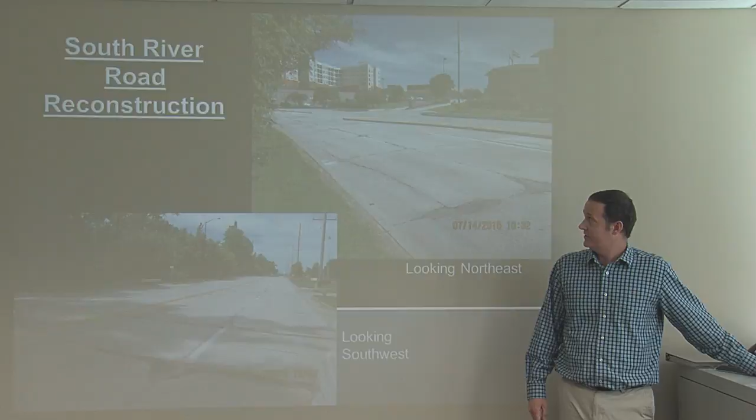Dave Hoekel Parkway, that's going to come all the way from 40/61 - that's where the Wentzville project comes in? Yes, that's right. So it's going to be 40/61... I don't know if I go that far, all the way down... where's it going to terminate at? It would go all the way to I-64, basically.

It does not show on the page, but it would follow in all the way past Summers too. It's basically following in from 364 - well, it is 364 up through Duello. It would become basically near the Parkway? Yes. I don't know if it would be named that, it probably wouldn't be, but that's basically the idea. So it makes a big ring around Wentzville to the west.

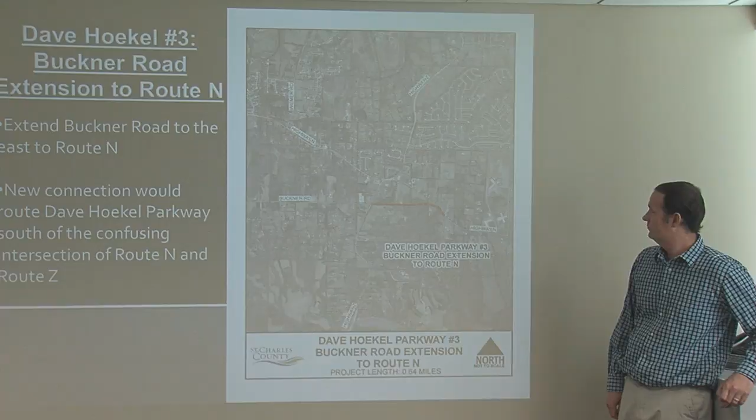Can you go to number 3? How far away is that strange intersection with Z and N? How far away is that from your red line? It's about a quarter of a mile.

It's where Mobil is, and there's like 2 houses, and then there's Buckner Road, there's a church - the church sits right in the corner of Buckner Road there. Yeah, there you go.

Is the thought to just leave that the way it is, or is there any future plans on improving that? It's so odd coming into that. I had understood MoDOT at one point was looking at roundabouts there, maybe two, one on each end, but I don't know where that's at in terms of their state planning. I just wondered how far away you are from that.

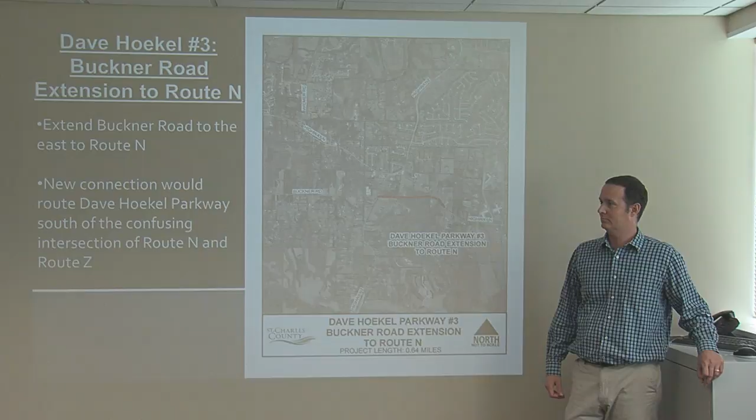Number 1, where Point Prairie comes in at 70 - Wentzville's doing their side of the highway, the north side. This is the south side of the highway, what we're doing.

Yes, that's correct. And isn't there a soccer park there, is that on Point Prairie? There's something planned - how far down is it? There's a 7-plex baseball complex, basically right where the realignment occurs from Dave Hoekel Parkway into South Point Prairie, just to the west of that tie. Further down, just south of the creek. Yep, right there. Gotcha.

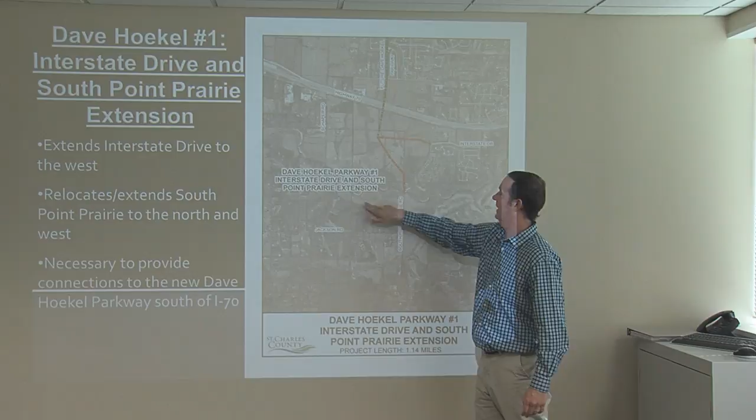All right, I got one left. Just to wrap things up here, I have the financials, just so you know.

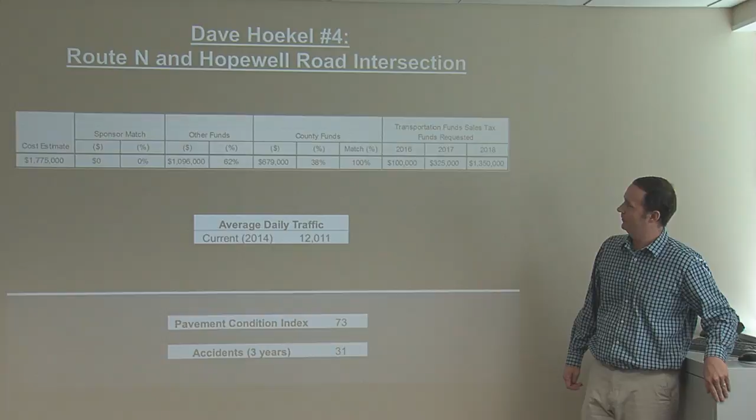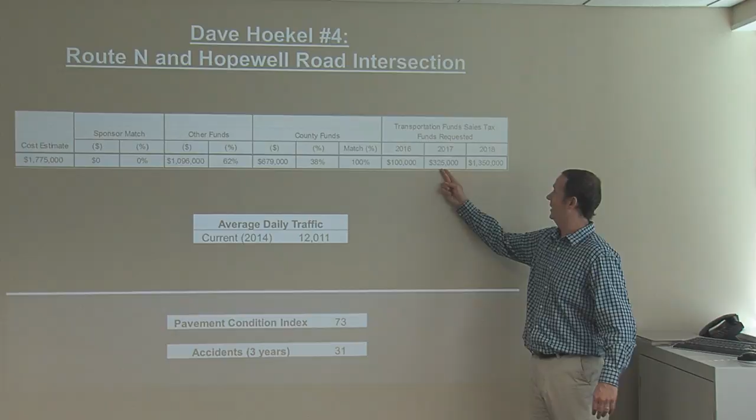The Route N and Hopewell Road for Dave Hoekel 4 is roughly a $1.8 million project. It's federally funded, and we federally fund just the construction, 80% of it. So we're looking at about $1.1 million in federal funds, and we'll come to the road board for $679,000. It's design, right-of-way, and construction in 2018.

That is all I have, unless you have any further questions. I had a question on the first one you did, South River Road. Is that road in the floodplain?

Good question, I would have to check and see. I think it's close to the floodplain, but maybe it's just out. Could you verify that? I'll do that, yes.

You got a lot of federal money on that one too, though. Yes, they love those preservation projects. $1.25 million of federal money on that. Any other questions? Thank you very much.

John, where do we proceed with scoring next meeting? What I was proposing to the road board in an email earlier, probably last week, is that if we can get the ranking from the board members, whether you want to stay and rank them tonight or at least in the next week or so, I can start taking the rankings, consolidating those, and get that information back out to the board members prior to our meeting in August.

So we have a meeting the third week in August. We generally make that a work session, but this year I'd like to see if we can actually vote on the recommendation in August. So we would discuss it, come to a recommendation, and vote on it. From a scheduling standpoint, that puts me in a better position to get the recommendation to the county council and finish up some of the contracts with the cities on the final recommendation.